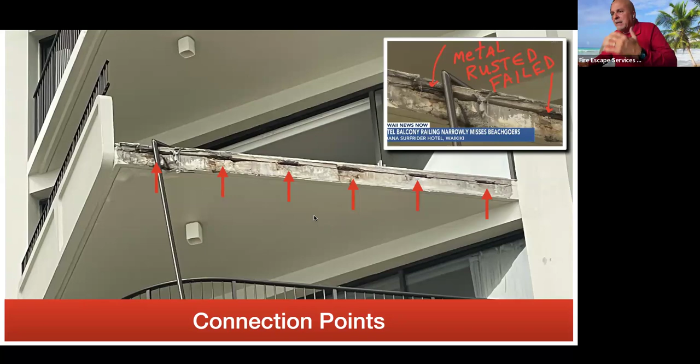But at the same time, everybody, if you're 25 to 50 years old and you don't have a maintenance program of any kind, this is already happening at your hotel. That's the life cycle of spalling. And Lance, you're going to go deeper on this. So, Lance, let's talk. Well, let me tag on to what you said.

You mentioned hotels, but we have to add in not only hotels, but any type of building, whether it's a condominium, an office building, any apartment building, any type of building that has railings in it. The building doesn't have to be near the ocean. It could be miles away. Correct. So if you're in Hawaii, it could be in Waikiki, Mo'iliili, Hawaii Kai. Away from the water, going to the mountains, higher elevations, it's still going to have the same conditions. Right. So let's go at the sequence of events, what occurred.

So definitely, this sheared. This was a catastrophic event. It sheared every insert. And every insert didn't have to shear. There was nothing there structurally. But eventually, whatever was left of any of the rust inserts, they basically just said, yeah, we can't hold it.

And the guy said, I was there at 5:30 in the morning having my coffee and a smoke, and it didn't fall. And then he mentions that his son-in-law and his daughter walk in and they see the collapse. The shake of the door, the opening up of a slider. I mean, a heavy pigeon? What happened here for this thing by itself to basically shear off the building? Okay, it sheared off the building. It ripped off the top railing round, right?

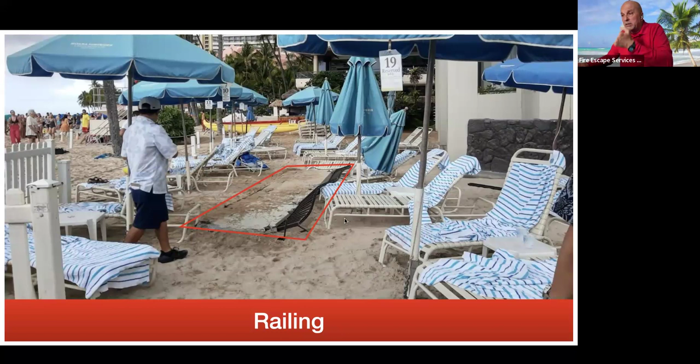And let's take a peek. Let's take a closer peek. You want to make any comments? These towels represent people that ran away. Yeah, I would like to make a comment. Somebody else looked at this photo, before you installed the rectangle red lines, and they said, wow, this is interesting because I see the metal railing, but what happened to the concrete wall that you were telling me about?

And I said, look closely. And he looked closely. He said, I thought that was sand. I said, no, that's actually concrete that fell off, right? That's the railing wall that fell off onto the sand. The reason why there's all that sand there is if you have some heavy weight and, let's say, you threw a heavy object into the sand, the sand's going to kick up and land partially on that object.

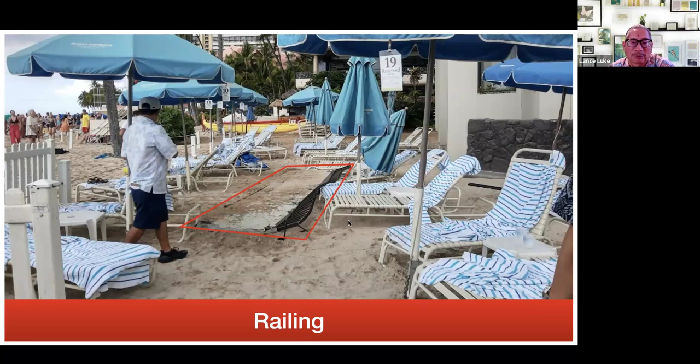So if you look, there's a lot of sand that's covered up that wall. So it looks like it's only sand, but if you look closer, you can see concrete. So there it is. That slab, if it hit anybody, it would cause, I believe, instant death. The railing got bent up a little bit simply because it hit some of these chairs. The slab is 6 inches thick. It's a one-piece concrete, and it didn't crack.

I don't see a crack. I could be wrong. Maybe this is the crack right here. You know what I'm saying? It split into two pieces. I think it did shatter here. But look at all the inserts. What I'm supposed to see here is pieces of steel sticking up 4 to 6 inches. Every one of these was 4 to 6 inches.

It's already embedded into it 4 inches. When they made it, the steel is embedded. I would assume these are all half-inch thick raw steel. And it was embedded into the floors up above at least 4 to 6 inches, maybe longer usually. And look, these are all the points where it's sheared. Look at the end here. Look how it destroyed the cement here at the end. This is from the fall.

This to me, Lance, see that piece over there? It looks intact. I think when it came down and hit that railing down below, I think it hit here, indicating to me that this thing, first of all, is in reverse. I think this piece here and this area here is the piece that would be upstairs to the left. I think this thing came down. This is the extreme left side, and that's the extreme right side because it's intact.

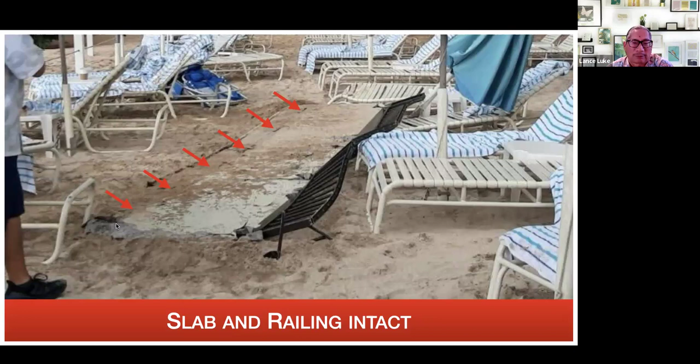But I want to add that even if the guy that was on that floor started kicking that railing wall with all his might, and let's say you brought in two 300-pound football players and they started kicking it, that wall shouldn't fall down. So the idea is this wall actually fell down on its own. And it's even more concerning, scarier because of that situation.

Yeah. The guy was there at 5:30 in the morning having a cup of coffee and a cigarette. His daughter and his son-in-law were there, and they're walking in the room because the room is not ready for them. They're just walking in the room, dropping their luggage, and as soon as they dropped their luggage, that was enough vibration, plus maybe a heavy pigeon that landed on the railing, and then this thing just took off by itself.

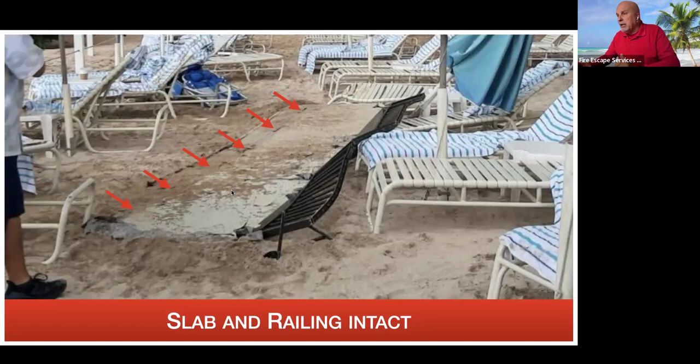And by the way, he was not the only one to witness it. So many of the people that were watching from down below watched it fall, and those witnesses would be great to tell us how it fell straight down, how it clipped the railing down below, and then how it hit the walkway, and then how it tumbled forward and into the sand. Again, this may be lost, but we may be able to have some witnesses that may come forward and help.

So let's talk about it. So right now it's been temporarily secured. Again, that room is probably not making any money for a long while, but I still have a slab. That's what the slab on the left looked like when it used to be on the right. And so, like you said, it was catastrophic. Okay. The question is whether it's an isolated incident on the structure. It's built in 1969. It's over 55 years old, exposed to the elements.

So every one of these is exposed to the elements. And as long as you've got it sealed, as long as you have a way for the water to run off that comes on a daily rainstorm, and you do some routine maintenance. But if you haven't done any maintenance, this is not an isolated incident. There's more hand grenades that could go off on this building as well as this building right next to it. Every building to either side, this is the canary in the coal mine.

This was the first one that we can go play with, but right now everybody, like you said, it's not just on the ocean front, it's everybody. If you haven't been maintaining your building in the past 25 to 50 years, you are subject to spalling. All right. This is a concern in California, just so you guys know.

So they had a catastrophic event that happened in 2015. A balcony collapsed on this apartment building that was no more than 25 years old. It was wood-based. They had about 20 people on this balcony partying. And when it collapsed, it dropped all the 20 people down to the balcony below, as well as it dropped 7 people, I think 5 stories down, 7 people from Ireland, kids who came over every year to work at the bars and stuff. 7 of them died.

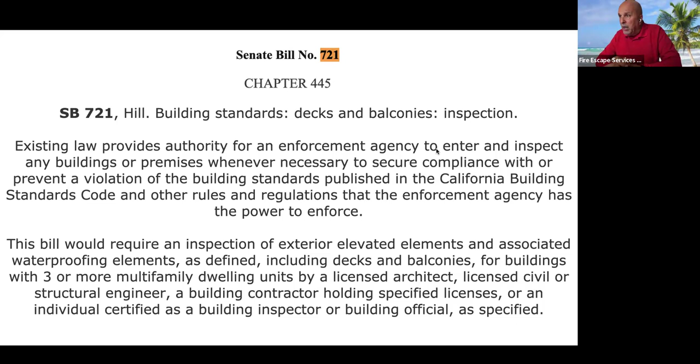So anything that's elevated, anything that's an area of refuge, anything that's a Romeo and Juliet balcony, any decks on the back of your building must be inspected, because it took 6 dead Irish kids to basically force this upon all of California. And like you said, Lance, you can't ignore it for too much longer, because since code is written in blood, the last thing you need is some more fatalities that affect the tourism industry, and all of a sudden things are going to start coming in, especially with inspections.

So let's move on. Lance, you had an interview with Diane. I'll play a little bit of it, Lance, and then we're going to go into your class of you teaching us about spalling. Okay. So let me play a little bit for you guys.

Related incident. Is that called spalling when the metal rots inside the concrete? Yeah, that's actually a condition of spalling. Spalling occurs when water enters the concrete and hits the reinforcing steel called rebar, and then the rebar expands. And when the rebar expands, it cracks the concrete around it. So that's basically the definition of spalling. And spalling is due to environmental conditions such as humidity, rain, sun, salt water, salt air. In Hawaii, there's a lot of salt in the air, and because this hotel is located right on the beach, because of the trade winds, it gets hit with a lot of salt air landing on everything, the concrete walls, the lanai floor, metal railing.

How long do you think that this was rusting? It didn't happen overnight. I would say between 5 to 8 years, something like that. So I lived in a condo where we had a lot of spalling work, and it took like 2 years. It takes forever, it seems, and it's really noisy. But what I don't know is, are the hotel engineers required to check for these kinds of issues? Would they have known? Do you think they were remiss in checking? Well, it should be a protocol for each building, whether it's a hotel or condo, apartment, office building, to have some kind of preventive maintenance schedule and inspection, going around looking at conditions like peeling paint, rust stains around metal railings and metal objects and so forth.

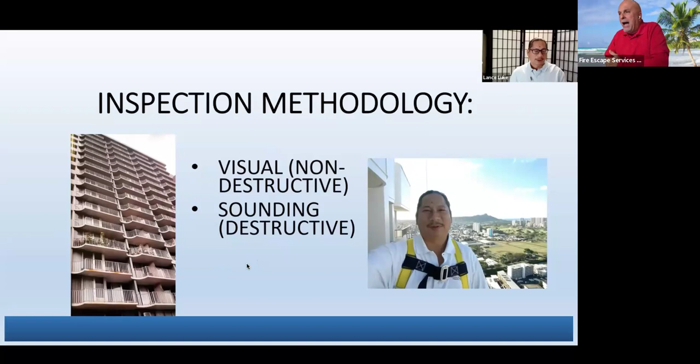Yeah, but when you see the rust stains, don't just paint over it, right? Oh, I know, but some people do. Oh yeah, they do, and then later on there's a problem. So yeah, you know what they do?

You know what they do with the cruise boats when they pull into a lot of the Caribbean islands? Basically, they've always put a guy out there just painting the boat white. So if there's any rusty streaks on a cruise boat, there's a guy that paints it every time it pulls into a dock. But they do have a maintenance program that every so often, when it's in dry dock, they basically go in and attack the source of that rust.

But in the meantime, there is painting cover up on cruise boats, but there's also painting covering up in a lot of these apartments and condos and hotels. That's right. So continuation with the spalling, gather all the information you can, compile all the results, and then let's go to the next slide.

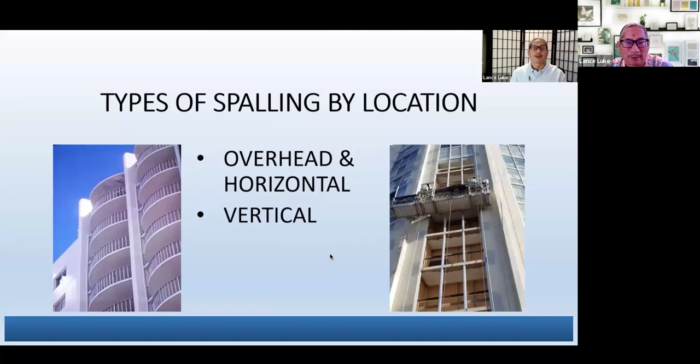Types of spalling by location. Overhead horizontal spalls: overhead is your ceiling, and horizontal means your lanai slab. Vertical spalls is by walls. So anytime you have any walls, vertical areas of concrete that's spalled, that's the location. So when spalling is determined, the contractors are going to bid on types of spall, overhead, vertical, and so forth.

Well, let's just make sure everybody understands. You always have three options if time is on your side. One is you can maintain. You know, it's growing. It has its life cycle. You're going to slow down the life cycle. You'll never stop it. You just can slow it down with membranes, with maintenance. But then eventually you're going to have to reinforce so that you can keep what was built there. It's going to need some help so you can buy a little bit more time with reinforcement. And then if you have no more time, it's called replacement.

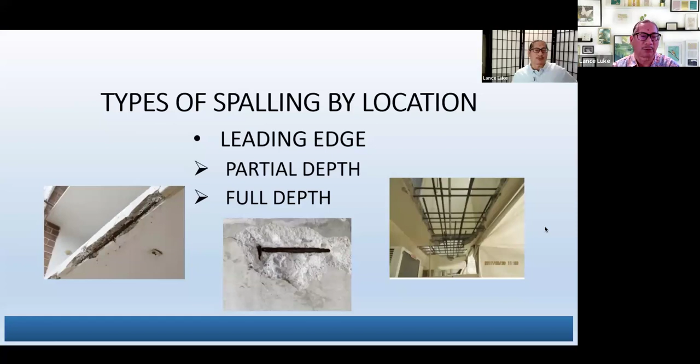And so this hotel that we're talking about right now, minimally, to secure the situation, they're going to have to reinforce all these balconies, whether they need it or not, based on this first investigation. Do you agree with that, Lance? Yep, I totally agree. All right, so let's continue. Let's see what else you got here.

You mentioned earlier that there's now better rebar. There's epoxy coated, and there's also fiber bars, Gator Bar, fiber rebars for example, and those don't corrode because there's no metal inside it. Right.

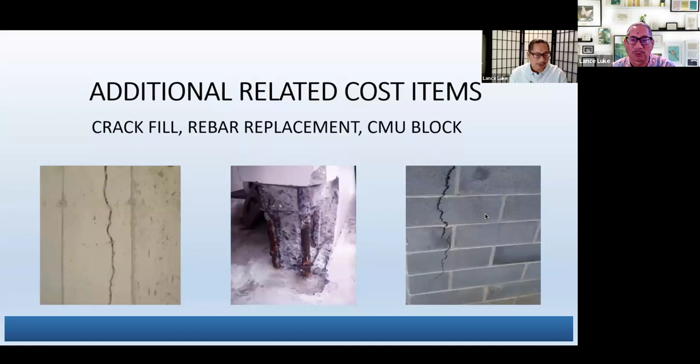Which is good. And then you have CMU block spalls. Water gets in. If you look at the picture on the right, it's not painted, so there's no protection. I mean, the paint or waterproofing is like paint on a car. If you don't have paint on your car, it's going to start rusting. It's the same way with a building. Yeah. You know, any kind of concrete.

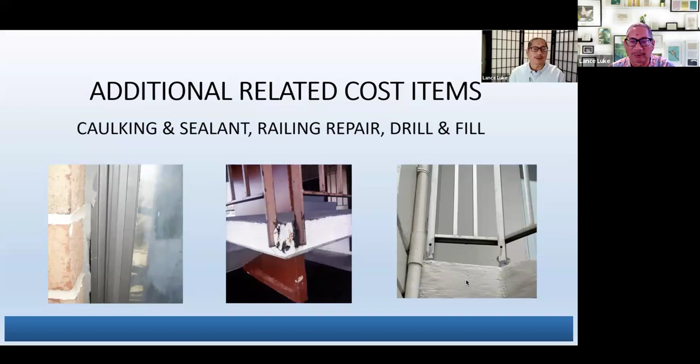So the idea is to drill and fill. What that means is you drill holes in and you inject some kind of material in it so that the humidity doesn't build up excess water at the base of the posts, and that's what causes the spalling.

And then people who are going out to bid for spalling repair, you're going to get a base bid versus unit cost. I always, when I'm running my spalling projects, ask for a base bid from the contractor and unit costs. The caveat is beware of the lowest bidder because the quantities may be different. Your low bid may be lesser quantities than the highest bid. So it's best to double check everything and understand what you're looking at.

Hire a consultant. Spalling repair is not easy to do. It's technical in nature. So you need to hire consultants to help guide you along the way.

Can you speak a little bit more about cement and how, when you do a one-piece pour, it's monolithic, but as soon as you put in a repair, those two pieces of cement don't like each other from the get-go? Okay, well, it's funny that you mentioned the word cement because cement is actually concrete.

One part of concrete. So the cement, along with aggregate, water, and sand, mix it all together, dries, becomes concrete. Of course, you add reinforcing steel in it. So cement is just one part of it. There's a lot of misunderstanding of the term. Like if you look at a high-rise building, is that building a cement building? That's actually not. It's a concrete building made of cement.

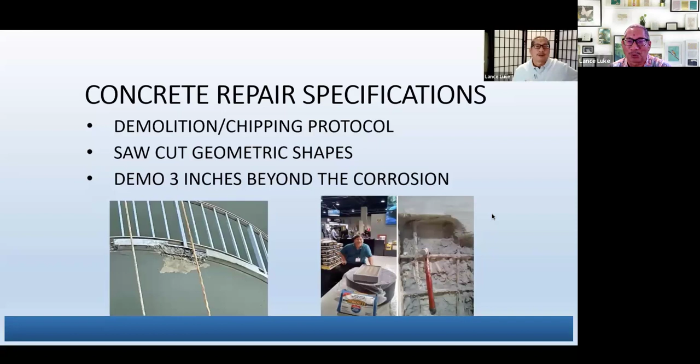And he said, hey, you did a pretty good job. What contractor you work for? I said, I'm an engineer. I don't do this for a living, but I inspect your guys' work. He felt sorry for me. He took me to lunch.

Listen, I'll give you my concrete story, and I want to ask you right afterwards, who put rebar and concrete together? I want to see if you can tell me what year did that finally come in? Because I understand why rebar is a brother to concrete, especially in certain construction. But let me tell you what I had.

My first involvement of rebar and concrete was in Long Beach, California. I got a fire escape inspection on a building built in 1917. It was a complete concrete building, no iron other than rebar everywhere. And even the fire escapes were all made of concrete. The stairs were all made of concrete. The supports were made of concrete. The slabs and the platforms were made of concrete.

And I got my first lesson on spalling and what happens. But again, it was a 1917 building. We had so much spalling happen, exactly what you just described. We had to go 2 to 3 inches beyond every rebar, cut out every rotten rebar, reinstall with wiring of some sort new rebar that had obviously some protection, and back in.

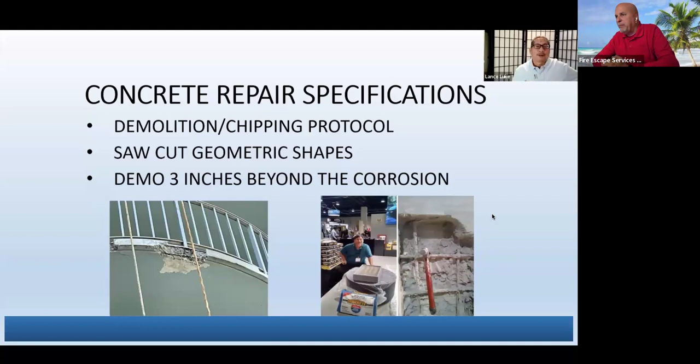So it's not, hey, knock on this and just coat the rotten rebar. It's not. You got to, in some cases, remove that rebar, put in fresh rebar, and then re-cement it back in with concrete. So who came up with this crazy idea that reinforced concrete with rebar was an answer for slabs, buildings, and all that? When did that happen? I'm not really sure. I think it was around the early 1900s or something like that, when rebar first came on the market.

But yeah, it's interesting. Here's a little backstory. I was in Rome about a year ago, and I inspected buildings there, the Colosseum, and old buildings. They were older than you. Can you believe that? But anyway, they didn't use rebar. None of those buildings had rebar. They had just blocks carved out of limestone or marble or whatever, and they laid those blocks together, and it was precise. I couldn't even fit my credit card in the joints. That's how close it was.

So I'm thinking, how can they build these big buildings, pyramids, and the Colosseum thousands of years ago, and they're still standing? And today they're building these high-rise reinforced buildings, and in 15, 20 years, we got problems. So something's wrong. Yeah, or total collapse like it happened in Florida, right? What happened in Florida? Yeah.

So continuing on concrete repair specs, there's a rebar replacement protocol. You don't just throw rebar in anywhere, anytime. Corrosion removal and treatment: you have to grind the rebar, remove the corrosion, and treat it. Now, if you're looking at the rebar cross section, and it's corroded more than 50%, then we spec out that you got to take that piece of rebar out and put a new one in. So we don't leave the old rebar there, even if they grind it down and you can see nice shiny metal. That's a no-no.

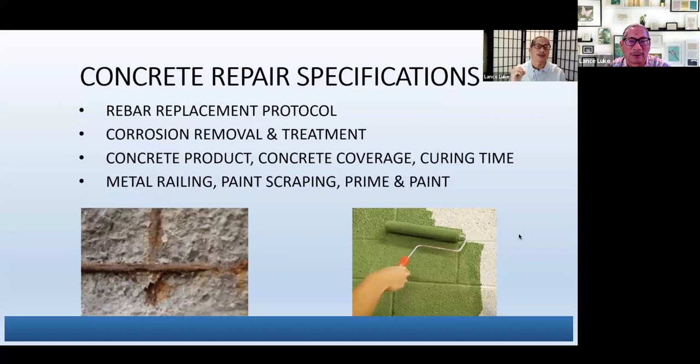Concrete product, we specify the type of product. Concrete coverage, curing time. Concrete coverage is important because so many buildings built don't have 2-inch concrete cover over the rebar. You got 1.5, or you got 1/4 inch or whatever. And that's a problem with spalling because you don't have enough concrete covering the rebar, and it's easy for the rebar to get wet and corrode.

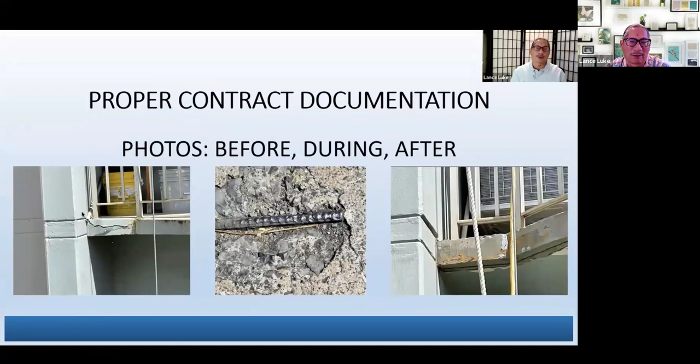Documentation: when you're doing a concrete spall project, make sure the contractor takes before and after photos, right? Before, during, and after. I require all of that just to back up the charges. So that middle picture is nice because I took that photo of a piece of area in a road. They had a concrete roadway and they didn't have enough coverage and cars drove over it. That's why that piece is shiny, because the wheels of the vehicles were cleaning the rebar. So it's always shiny like that.

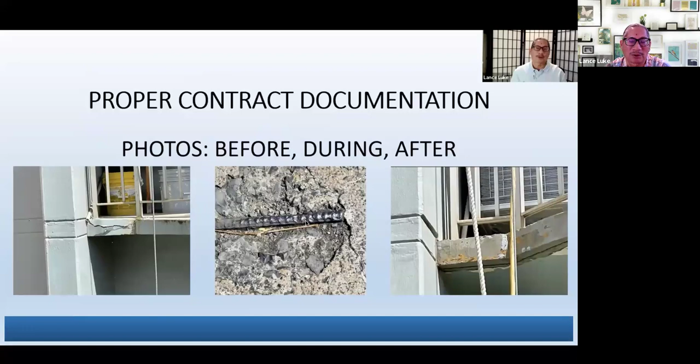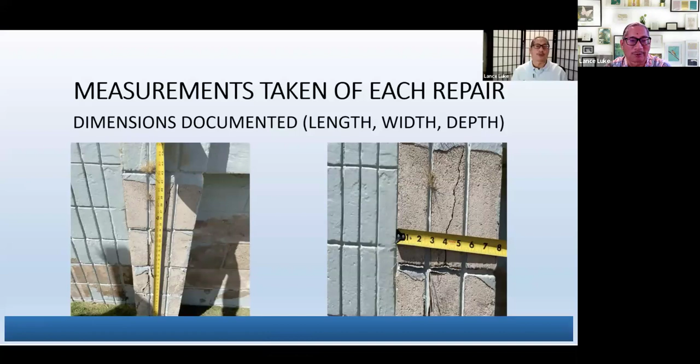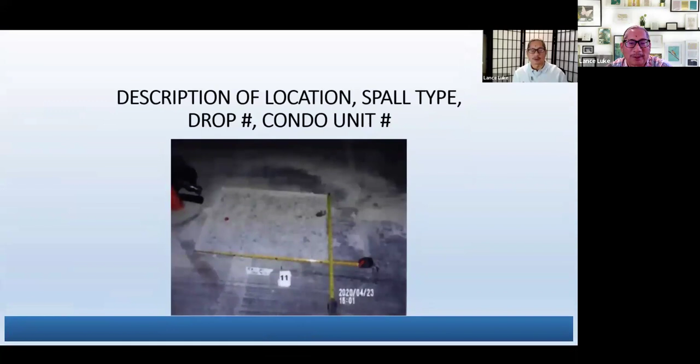We take measurements, we document location, spall type. So we don't just tell the contractor to fix the spall. We document basically every square inch of repair that they're doing, because they're charging unit costs. So yeah, this is of a basement parking area. So we measure it, document what was done and all that.

And again, we already talked about this. You can maintain your railings because you have a program of some sort. So maintain them because there's nothing wrong with them. Stay on top of them, keep maintaining them. You can reinforce them because in your investigation, you found they're weak, not broken, not catastrophic. They're just weakened. I definitely see rust. I definitely see that it's wiggling a little bit. Reinforce it. Same bolts, same connection, or reinforce it. Add a clip. Do whatever you have to do.

Or you're at a catastrophic state. You got to replace. Those are your only three options to buy time. Keep maintaining, reinforce, and then keep maintaining, and be prepared, because it's so advanced that you are definitely 5, 15, 25 years away from replacement. Because once you've let it go a little bit, it's already accelerating. So here's the first guy you're going to use.

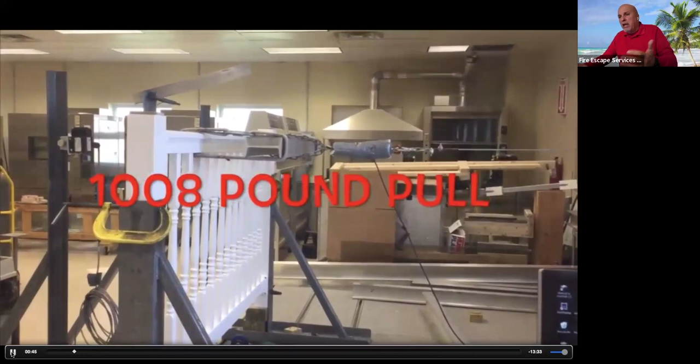But the things that are there, you have to trust your manufacturer. You have to trust your installers. So step one, let's trust your manufacturer. Let's trust your installer, because they've done testing. And what is their testing? At their factories, they're going to yank on these railings until the breaking point. We are never going to test to the breaking point. We are forced to inspect to see, will it handle normal wear and tear, and we only have to have a 200-pound concentrated load.

We will never go there and do this. Here we go. Let's keep going. Not enough. Let's keep going. No, Lance and I will never go to this point. We're not going to test it to the breaking point.

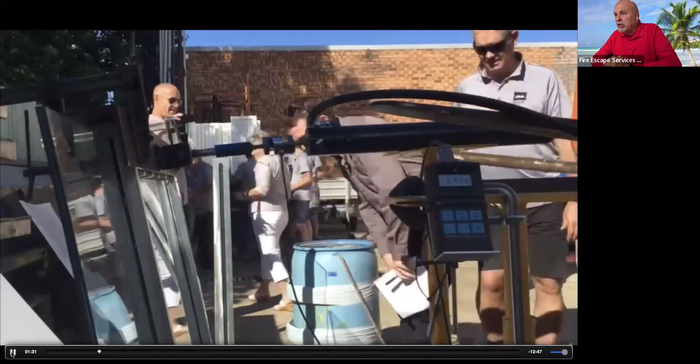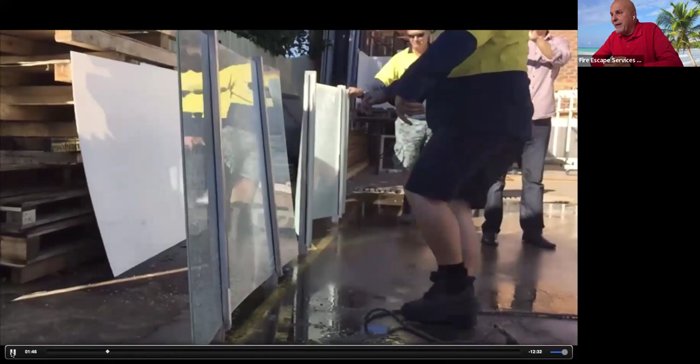You want a company that you guys trust that basically says, give me 200 or 225 concentrated load. Guys, these are companies that have tested the glass railings and how far can you push it. Then they start testing if it does shatter, what happens? If shattering, can somebody get through it? Nope. Here, laminated glass is there to protect things from happening. But that's what your manufacturer is doing.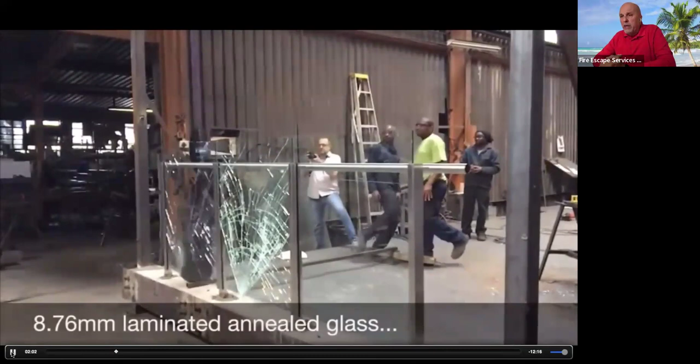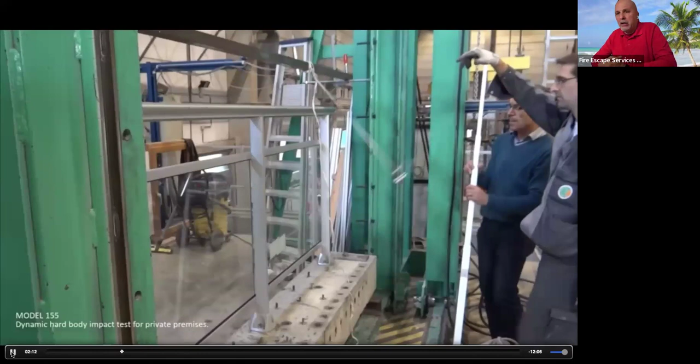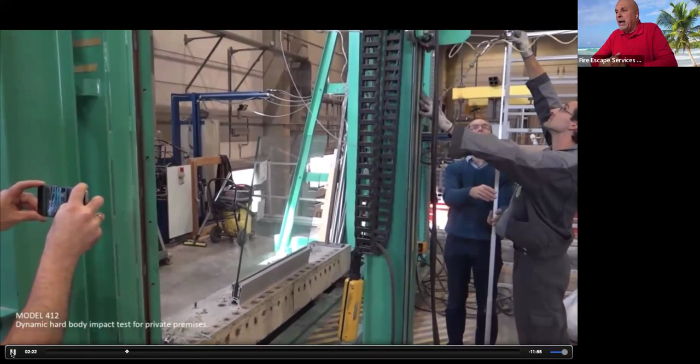They've given you testing on all the railing styles that you have, whether they're glass or iron, and their job is to show you that you're not going to get through the glass, you're not going to get through the iron, because of what the manufacturer and the installer do on all your buildings that are hotels and condominiums. Even if you want to take a coffee cup and whip it at the glass, you know what I'm saying? It's made to basically reject. So here's another dropping of the ball, a nice iron ball.

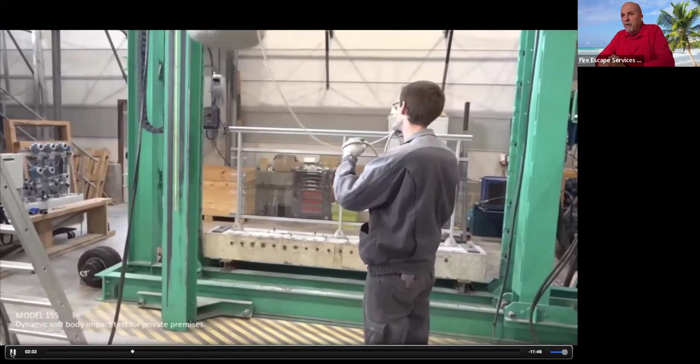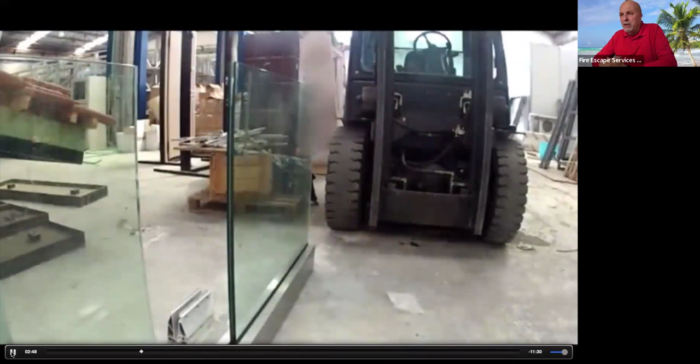So trust your manufacturer. What is swing testing? Your manufacturers have all done this. If you throw your body at these things, this is where it's going to have resistance. So we trust that every railing has been tested to 500 pounds, 1,000 pounds. We only need to test it to 225 pounds. And we don't do this type of swing testing, right? That would involve too much rigging, right, Lance? We'd have to rig up something with a cable from above, and we'd have to have a certain weight bag of some sort, right? And God forbid one of these things does break. We don't want anything falling down below, correct?

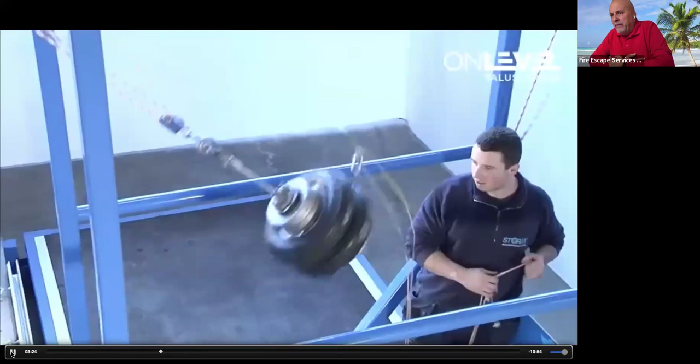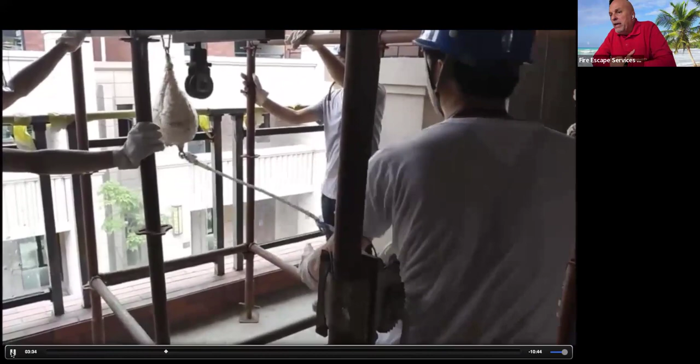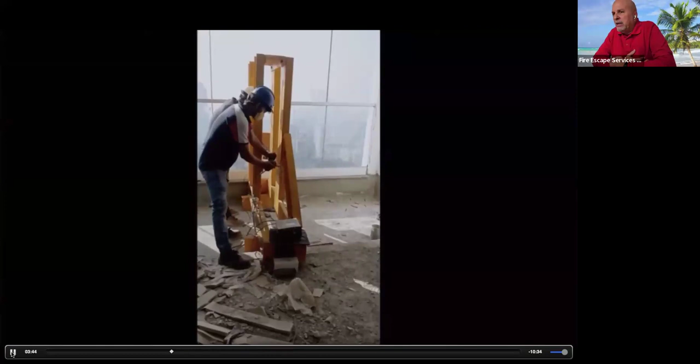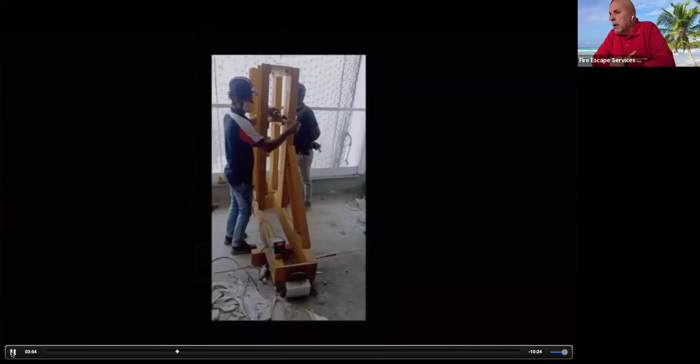Right. So everybody all over the world has a little bit of an idea of what they're testing. And so we've pulled this compilation together for you guys to show you to trust your manufacturer. What we're testing has already been approved and installed correctly. Now we can do this to the top rail, but we don't have this thing that we have to do outside every hotel room. So we're going to be manually testing after the installation. What is that? It's basically a contraption of some kind that allows us to manually push on the glass down below, push on the railing up above.

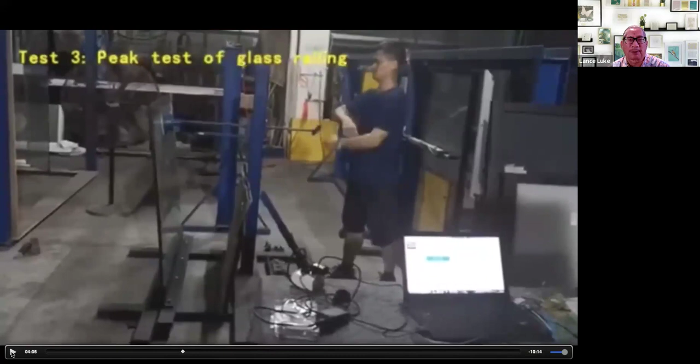225 pounds, Lance. Is that good enough for you? Well, yeah, that is. I mean, the code is 200, but remember, that's just the minimum standards. Right. Well, that's all they want. They don't tell us to test it to the breaking point, right? So we go to 225 and we push on the middle, we push on the top, and we push on the two ends that have the attachments. So most railings or balconies are going to get tested in 3 locations: the left, the right, the middle. And if it's a long balcony, you're going to get the left, the right, the middle, and then splitting that difference. So you're going to get 5 tests. Would that be satisfactory to you, Lance? Yeah. Okay, let's keep it going.

So this is that screw. Any contraption we can use manually; to keep costs down, you've got to stay away from the hydraulics. Here's a guy testing cement railings. Check this out. Children were playing on them. They broke from underneath the children.

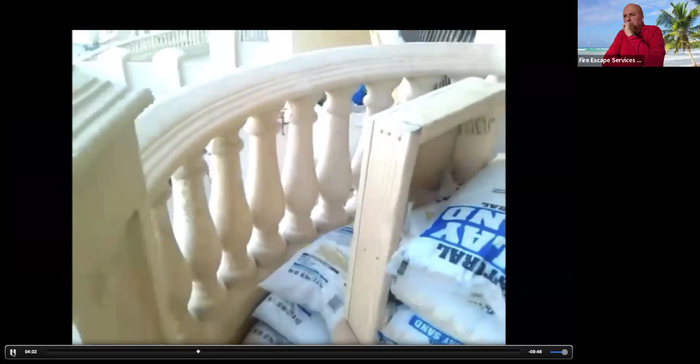So today we're testing additional balusters to see if they can withstand the load capacity set forth by the Florida Building Code. So here we have our load test area. We have concrete balusters. We're going to be performing 2 tests, a 400-pound point load test and up to a 100-pound distributed load test. These concrete balusters are supposed to be pinned, anchored to the concrete slab below them. In this case, it doesn't appear that they were anchored everywhere. That's why we're testing them.

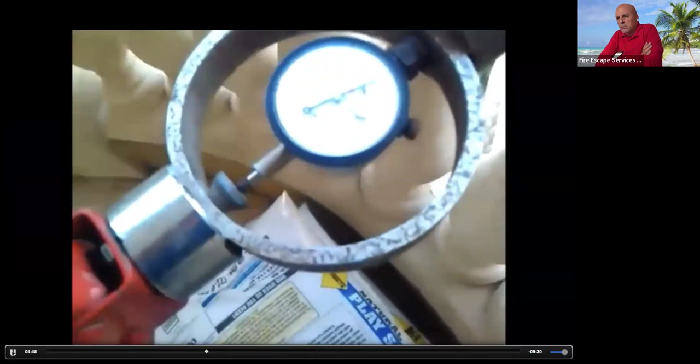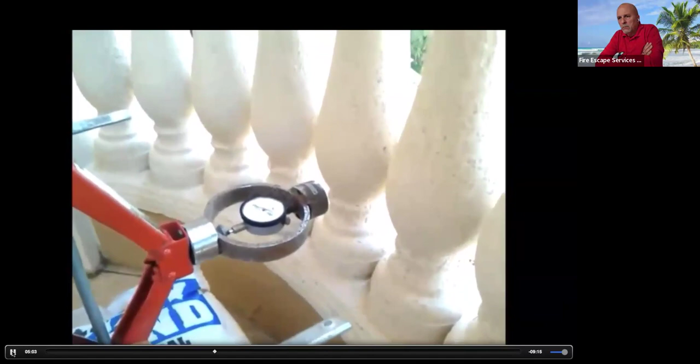Now our test rig is set up. We have load at about 6 pounds to start, so it's essentially zeroed. We're ready to start. Okay, test was complete at 400 pounds, point load application at the top of the baluster. All we observed was the rail starting to pull away from the column. No other damage observed. Here's our second testing setup. We're testing the intermediate point on the baluster. The 2001 Florida Building Code specifies 200 pounds at any intermediate member, so we'll be testing up to a load of 400 pounds, a 2-times safety factor. The balusters have sustained a 400-pound point load without any cracking or noticeable displacement. We're gonna let it sit for a few minutes and make sure that nothing else happens.

So if I may, Lance, you agree with that, right? A lot of railings, maybe in Hawaii, you're going to have some beautiful ones made out of these concrete pieces, properly put together, properly attached. You want to load test, a point load test at the top of the rail, a point load test at the middle, and then he tested, I don't know if he showed it on here, but he brought 500 pounds of weight to do 400 pounds of testing.

Is that pretty much the right way to do it? And it's pretty manual what he's done there. He's got 50-pound sandbags, created this resistance wall, for lack of a better word, and then he's doing this test. Would you agree with that? Would you sign off on that if he did it that way and gave you back information?

Yeah, except I don't think you need to go 300, 400. That's overkill. It's 220. 200 is the minimum, and we do 225 just to play it safe. Meaning that it's the ass test. If my ass, drinking and smoking, leans on that thing, you're exerting about 200 pounds on a lean. And not even that, a body that weighs 200 pounds leaning on a railing is only exerting about 100 to 125 pounds. Wouldn't you agree?

Yeah, maybe instead of bringing all the equipment, we'll just have you lean on the railing. Oh, Lance, we can't go there, Lance. Come on. Here we go.

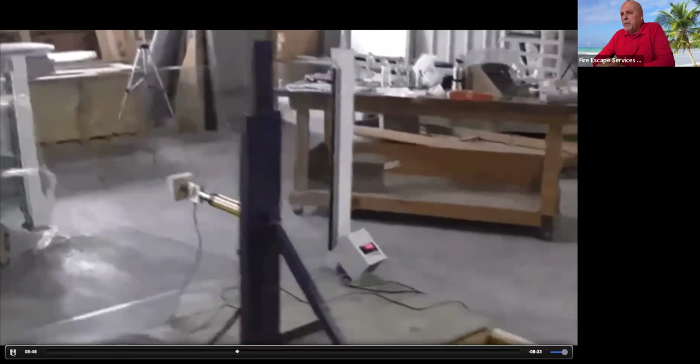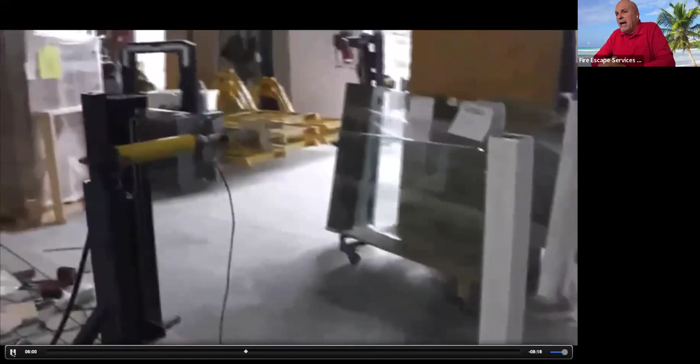So here's another system that they come in and they're going to exert 450. As you can see, they're bringing it to the breaking point. Only 200 is needed. You don't need 300 or 400. And again, this is on a glass. So you need to do it in the middle. You need to do it on top. You need to do it on the sides because you're really testing the fasteners on either side, right? So let's keep it going.

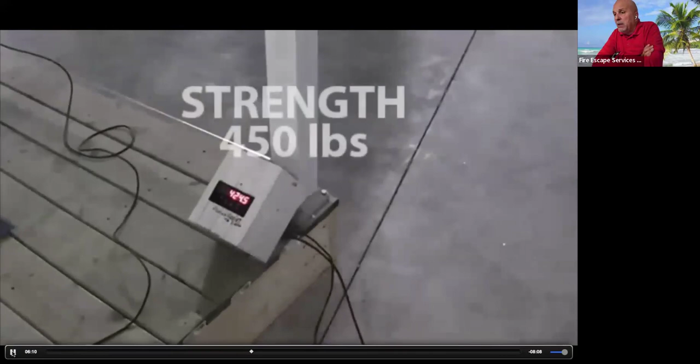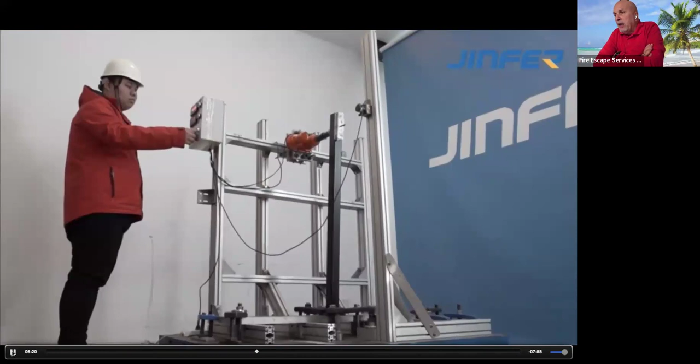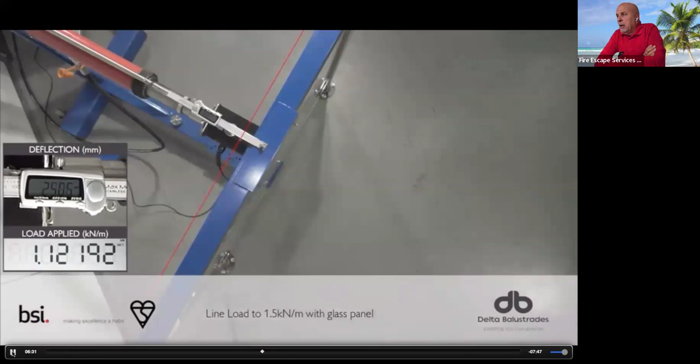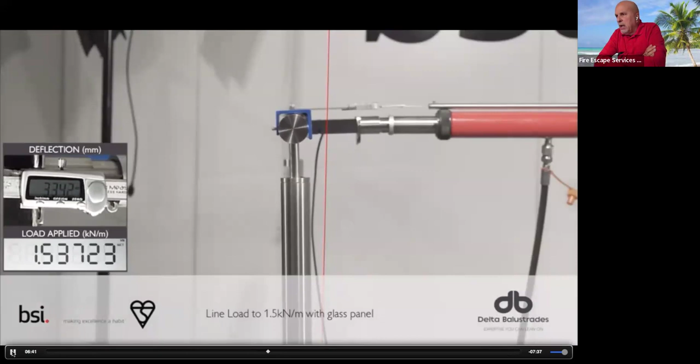As you can see, glass, my God, is very strong, unbelievably strong. And we're only testing to 200. So some of the posts that are holding these things up have been tested by the manufacturers. The hydraulic people test at the factory, they test at the testing facilities. So trust me, some of the rails you have bought are acceptable. Look, they push these things to 1,000 pounds, so we are accepting that the manufacturers and the installers are putting in a product that will resist minimally 200 pounds. You agree with that, right?

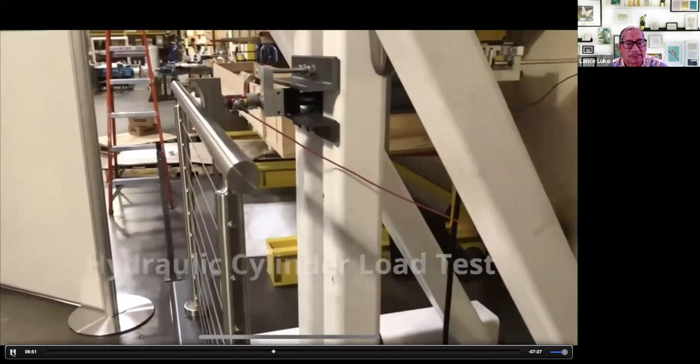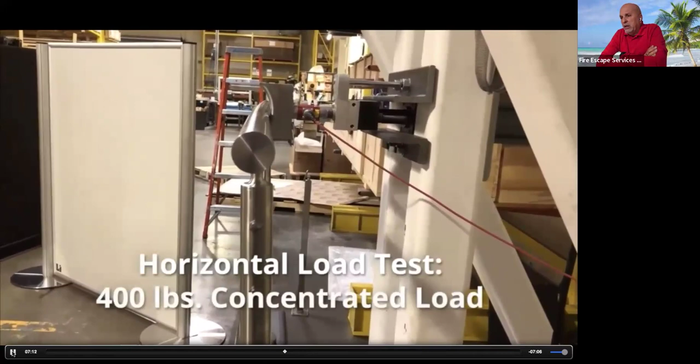Yeah, I agree. So some of these tests are horizontal. Some of these tests are going to be vertical. So we believe that everything we're going to be looking at is manufacturer tested. And one of the things we're not going to do is test from the top coming down. That's a test that you're going to see here. That's the horizontal resistance of 400. There's the vertical resistance. We're never going to do this, right, Lance? There's no vertical testing of any kind, correct? No, you don't need to do that.

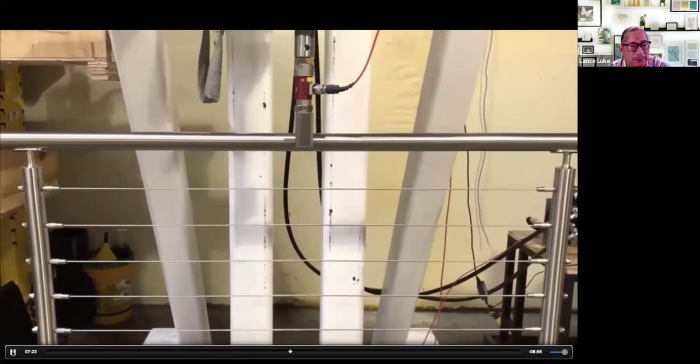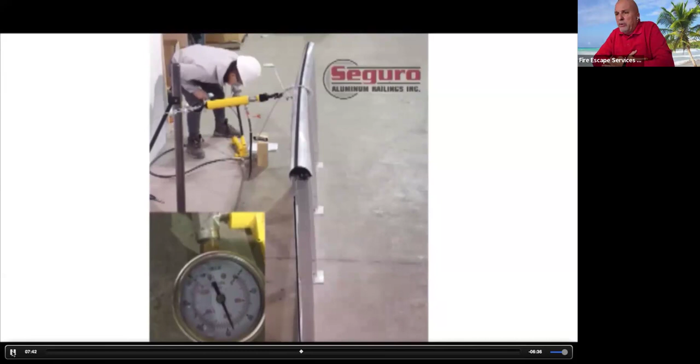Now, some of the hotels may not even have glass. They may have mesh. So you have to test this mesh to see if it doesn't pull away or disassemble itself in certain testing. So, again, anything and everything is for: can people get through the glass or get through the mesh? This is obviously stress testing it beyond the 200, but this is, again, a compilation of all the things out there in the country that we've been looking at.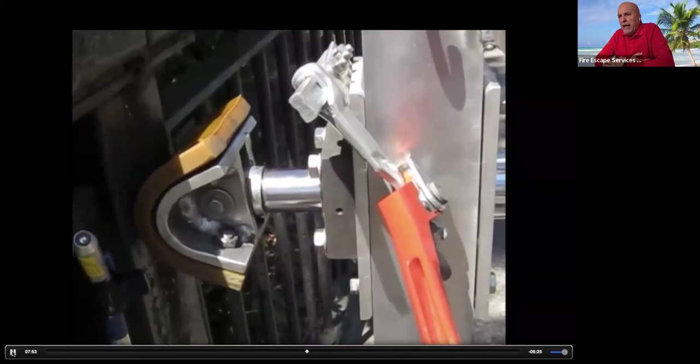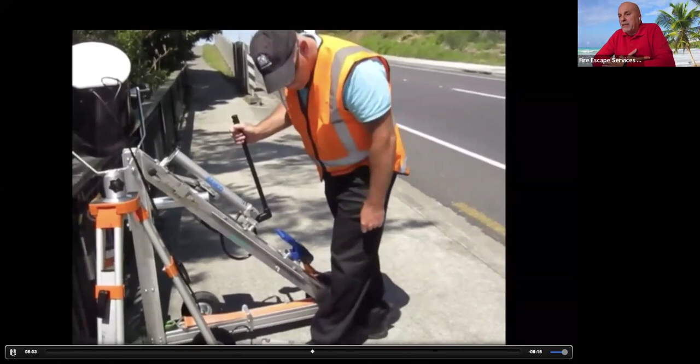Here's the tool. This is a $5,000 tool made of aluminum. For these guys to bring these tools, or have 5 or 10 of these tools at your apartment or your condo or your hotel, these things ain't cheap. So how can we simplify this? This is some of the work that we've done when we have to lateral load test every fire escape, old or new. Took 200 pounds. And all it is, we have a simple mechanism that exerts a force and pushes out in several locations.

So this is where, you know, some of the hotels and some of the apartments have railings outside on cement slabs. All right, and the 200-pound lateral load, you have that down here. Biggest issue is those railings need to be tested, the bolts are undersized, right, Lance? On both sides. Yep, that's right.

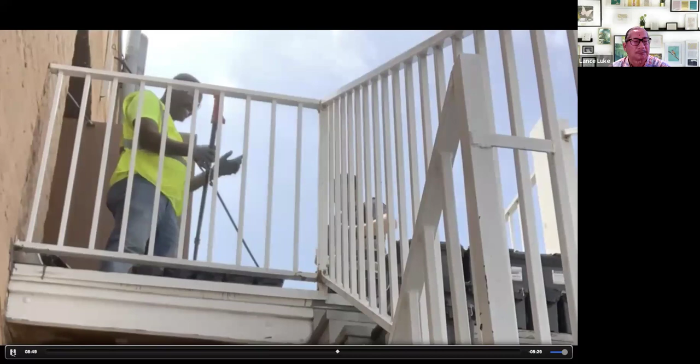So you might have wood structures. You might have a wood structure that has these aluminum railings. They too need to be tested. And what is it? Simple, 200 pounds. So create the tool that basically is going to allow you to exert a standardized force of 200 pounds.

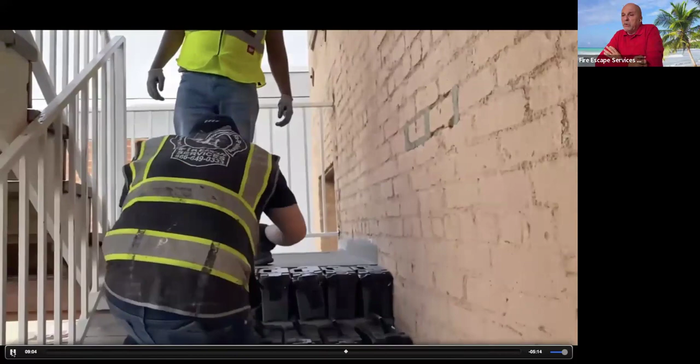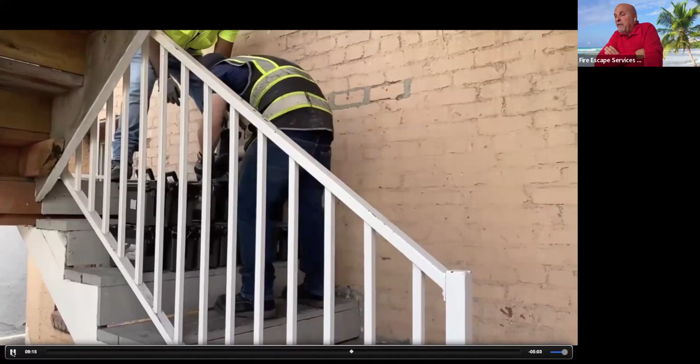By the way, Lance, whether it's wood or cement stairs, this is called a cascading load test. And depending on the size, you're going to put anywhere from 350 to 450 pounds of weight. And that's all you do, just cascade. It's like a rolling weight box coming all the way down. So Lance, if somebody did this for you, would you okay it?

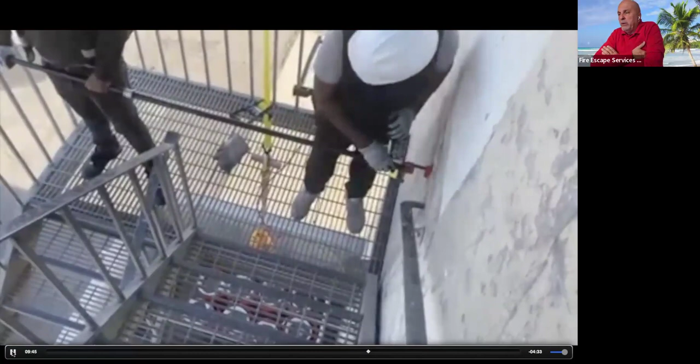Yeah, that sounds good. But I'm kind of concerned because I definitely know a lot of buildings are not going to pass that. Well, we always do a pre-load test evaluation. Don't think we just load test things. As soon as we find deficiencies, you can't load test. You stop the load test. A pre-load test evaluation with deficiencies means you have to repair it before we can load test it.

And the key about load testing is this: there is no load testing after you fix something, because you fixed it. It's in the code. The NFPA code says the authority having jurisdiction shall accept by load test or other evidence of strength. And what is that? If you fixed it, repaired it back to its original condition, there is no load test for the next 15 to 25 years.

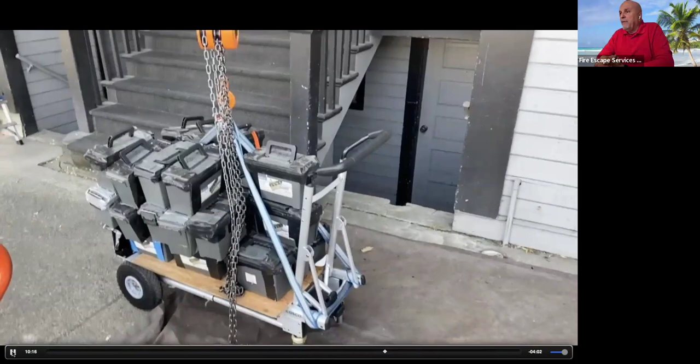So again, if you're on a fire escape, if you're testing a ladder, some of these things will apply. You do have a few fire escapes left on your entire island. Not many. The rest have all been replaced with cement. And this is called a load test that involves 100 pounds per square foot on cement and/or steel. And a majority of Hawaii is cement, poured-in-place staircases. But this is just us showing you again cascading load tests.

In some cases, there's no other way to load test it other than to bring 50-pound sandbags to the location, and we cascade coming down. So you load test the first platform. 100 pounds per square foot means that a 10 by 10 or a 5 by 10 fire escape is going to need 5,000 pounds of weight on that.

And these are all cement stairs. You know, the ones that you buy and then you just attach to the metal stringers, weld them to it. So how do you load test those? The best way to load test cement stairs is to do what's called a cascading load test. So after you complete the load test at the very top, you then come down.

And as you can see, Lance, unlike you, I do work sometimes on load tests. You know what I'm saying? I just don't ride around in my Mercedes like you do. I like that. I even saw a little image of you on your phone ordering lunch. So that's there. Good. You go.

So this is called a cascading load test, and basically for a period of time, 5 to 15 minutes, you just keep moving to the next treads, and that's us doing the lateral load test on the railings using that mechanism, that tool, and we basically exert 200 pounds to make sure it's going to hold.

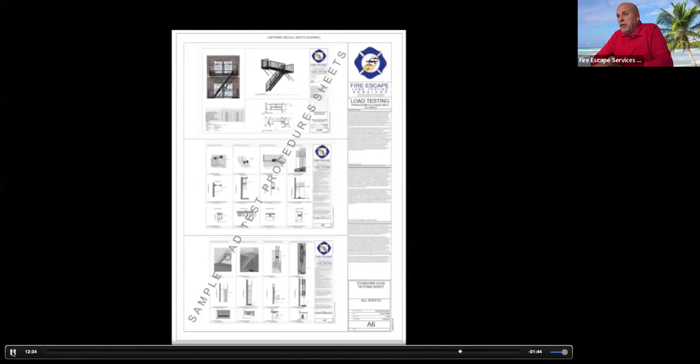Again, no ladders allowed. This is load testing procedures. You have to submit this to some city officials to say, what are you going to do? Show me before you do it. So we have load test procedures. This is some of the strapping that you would use when you're load testing. Some of these have 2,000 pound rating, 5,000 pound rating. You have a 1 ton or 2 ton crank chain fall.

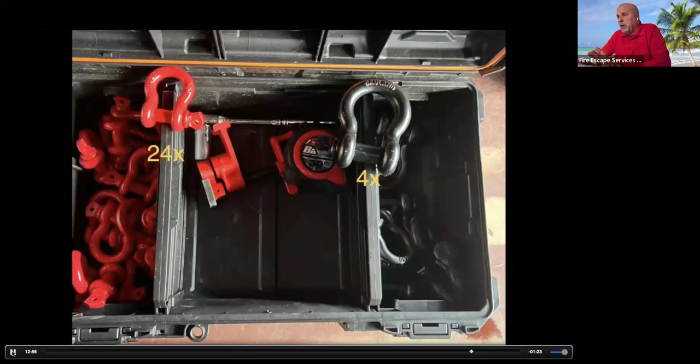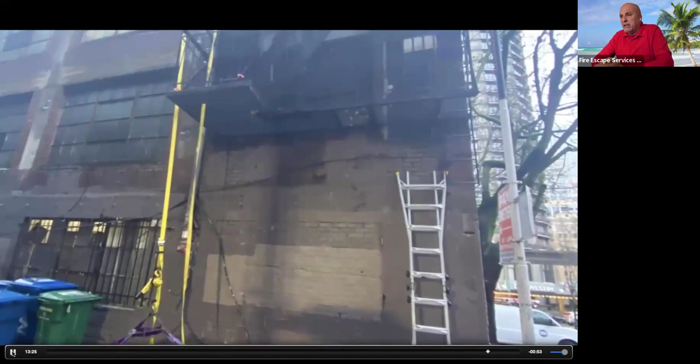You use obviously your digital scales as needed. So 48 cases of 30 pounds is how you transport it back and forth. This is going to be us in California, load testing a very small system. Again, load testing the left and the right, hammer test all the staircases. And then the following video is going to be us load testing the left and the right side simultaneously

of a fire escape where you put up 40%, take measurements before, during, and after. And what you want to do is basically not load test the same floor at the same time. So alternating floors are being load tested here. And you can get in and out. See the guy measuring the before, during, and after to make sure there's no deflection. The guy at the very top is doing lateral load testing, so it's a team of 3 to 5, depending.

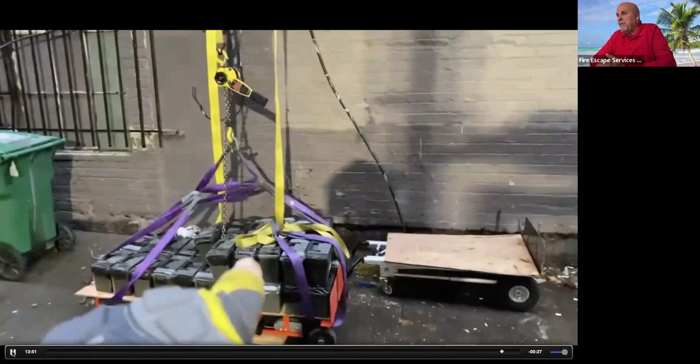And the key right now is just, how are you exerting 100 pounds per square foot on some of these 75 to 125-year-old structures, okay? And what do we have left? What do we have left is now back to you. Because what happens here, Lance, is that we have not an isolated incident that occurred in Hawaii. The building to the left is just as concerning as the building to the right of this.

But you have a piece here that in 2017, Lance, there was a death. Yeah, 2016. 2016, there was a death, and this is the extras, whether it be the egress extras, whether it be railings, and whether it be, you conclude on another video we're going to show. But before we get started, let's see if anybody has questions for us before we talk about the third thing that needs to be looked at, because we're focusing on balconies and railings, because it will hurt or kill somebody.

But let's see if anybody has a question for us from the people out there. Questions, anybody? I got a question from a member in the audience. She's a new mom, and she wants to know what age is considered to be safe for a child to be out on the balcony. I have an answer for that.

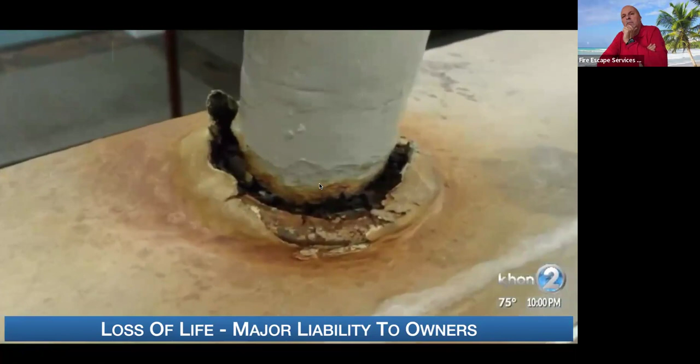The condition of the railings at the state's largest outdoor shopping mall was thrust into the spotlight when one of the banisters gave way in October of 2016. 21-year-old Nicholas Freitas died, and 21-year-old Macroy Nagato was severely injured, having to spend months in a Colorado rehabilitation center. Luke says with construction finished, the railings are up to code and, most importantly, safe. He explains the reason the new railings were made using aluminum rather than steel. Steel actually corrodes. It corrodes a lot faster than other types of metal like aluminum or stainless steel.

In a statement, the general manager of Ala Moana said today, Ala Moana Center is constantly evaluating and adjusting to help in its mission of providing an outstanding environment and experience for all. The attorney for the two victims told me today his client who survived the fall is home but wasn't able to comment on his condition. The city issued the mall a notice of violation after the accident, but the case is closed now that the work is done. Howard Mercer?

So, Lance, I don't know if you were able to give away, because you were an expert witness on that, was the settlement for the person who died significant and in the millions? Yeah, it was huge, both for the estate of the person that died, and then the other person is actually severely injured for life, basically incapacitated. And so it was big. I also want to add that the photo that you saw of the corroded railing, with the heavy corrosion at the base, was a photo that I took that I gave to the news.

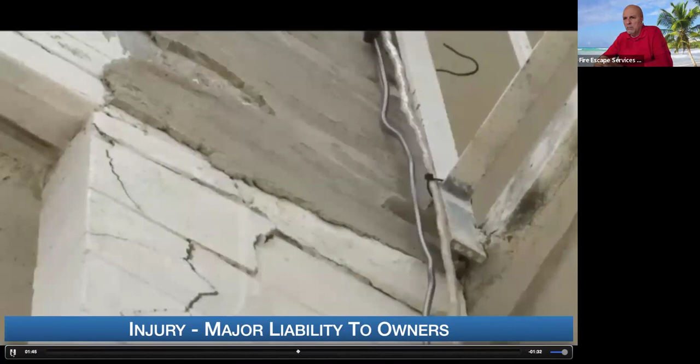The city's Department of Planning and Permitting issued this notice of violation in August of last year. It says a third-floor unit was in violation for the front door frame rotting and the concrete eave above the patio was spalling. The city says corrections were made and the owner was not fined. The owner was reminded in writing to maintain the structure in safe condition at all times. The violation notice doesn't mention other problems.

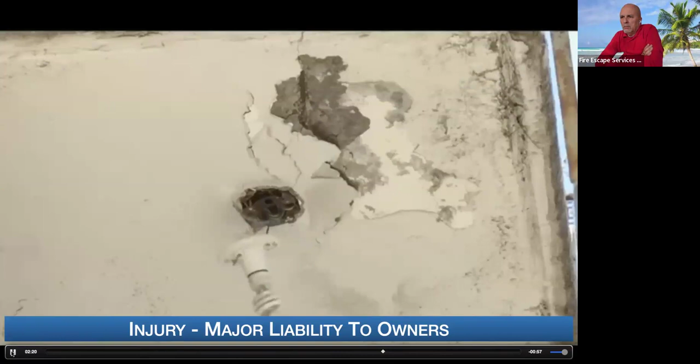If I was the building inspector for the city, I would have written up additional comments to my report in addition to the specific item that he looked at. But I don't know, I can't speak for the city building department. Building expert and construction engineer Lance Luke says it doesn't look like the building was constructed properly or is in compliance with today's standards. And he doesn't believe it's safe for the people to be in there now.

It's up to every building owner to maintain their property. It's not up to the city and county building department to go and monitor and inspect every building. That's not their job. The city issued another violation notice after Monday's incident, saying the damaged areas and third and fourth floor railings also need repair. Luke estimates about $800,000 worth of repair work.

The city says they did not inspect the entire building, and they're still in the process of hiring 7 more inspectors. We went to the owner's home to try to speak to them. A woman there said she was the owner's sister, and a number she gave me to get a hold of the owners was disconnected.